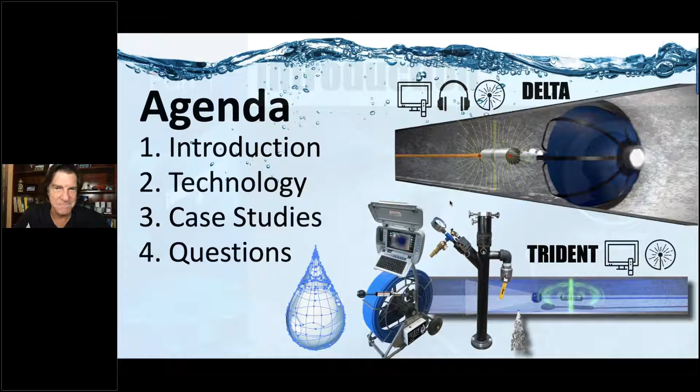So 40 years, 1980, I just turned 65, so been at this a long time. And when I came back after selling Hansen, I got the question, do we really need another way to find a leak? We've got some outstanding technologies that have hunted and identified a number of leaks for the last 100 years. But they all pretty much had one thing in common. If we looked at the past and present of acoustic and some of the data loggers, it's no secret that we don't use these technologies to actually approve new installations. We're pretty much using hydrostatic testing.

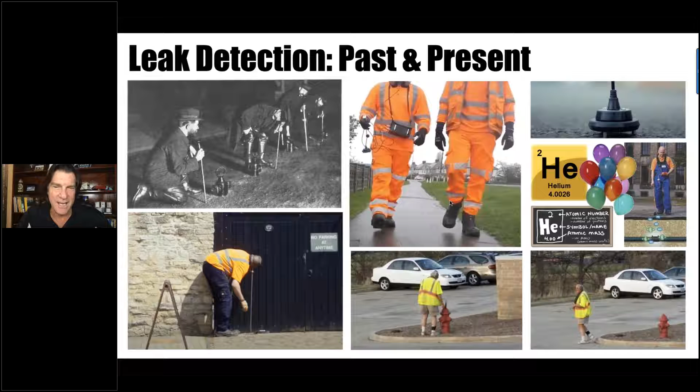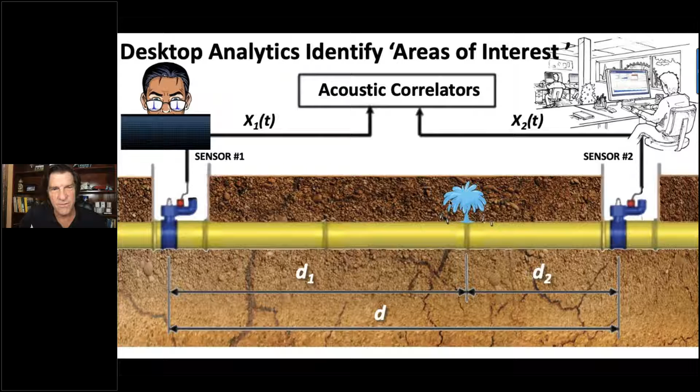So this notion of leak detection and water tightness testing is a big gap in trying to improve our leak detection capabilities. We've had a lot of success with acoustic data correlators, finding that leak location between 2 points above ground. We can do that very quickly. The problem that we've been hearing over and over again is, yeah, we did a clamp on that. We're now going back to that very same pipe. And it's not just once or twice, but 3, 4, 5 times. Why can't we just identify that pipe profile correctly the first time?

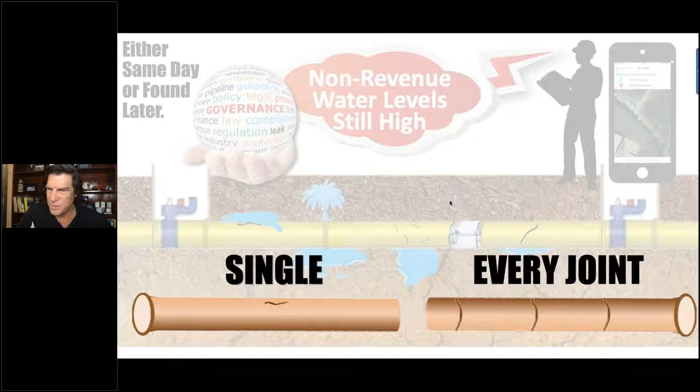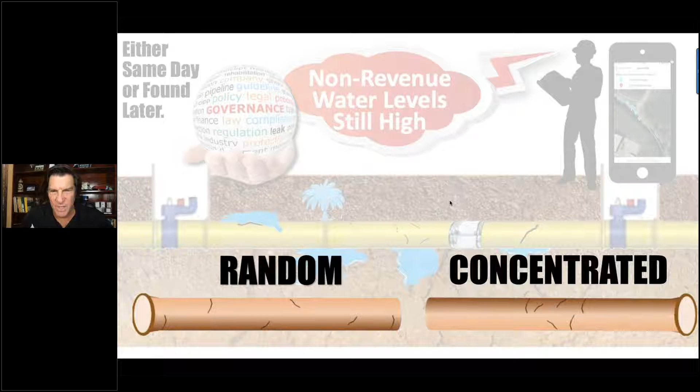And really what we're asking, is there a way to determine, do I have a single crack, problem, joint leak? Do I have something at every joint? Is the problem random throughout the pipe wall, at the service connection, at the tap, at a joint? Or is it concentrated? Because when I go through my AI to actually come up with repair rehabilitation strategies, that's the information that I'm really looking for.

We all know the challenges. The acoustic vendors, some of which may be on this call, don't like to hear this, but the environmentals are really against us in a lot of cases. We know, for example, with household use, there's a good reason that we're using acoustic listening sticks and correlators and data loggers at night when there's not a lot of use. We do know, contrary to popular belief, that if I've got a leak and it's filling around the pipe, that is an instant insulator to that leak. And I'm relying on that exit wound or that exit point of the pipe really to give me that vibration as we go forward.

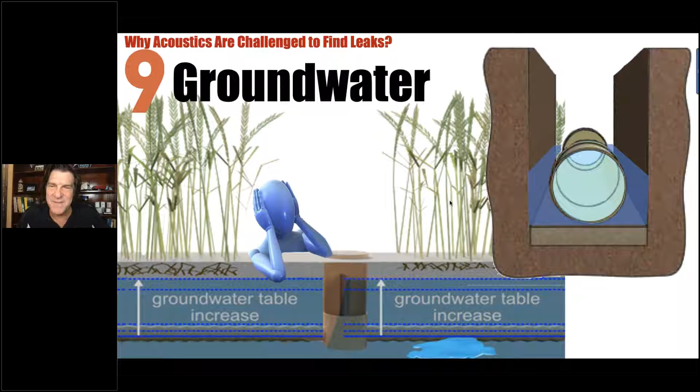Pipe size and material. We're not going to go into it, but a lot has been written. A lot of folks really have seen what can't be found in plastic pipes. We all know tuning forks are never made of plastic, so that's for good reason. Couplings and repairs. Sometimes even a repair can be a false positive, an indicator of a leak when we really don't have one. It's just a change of material.

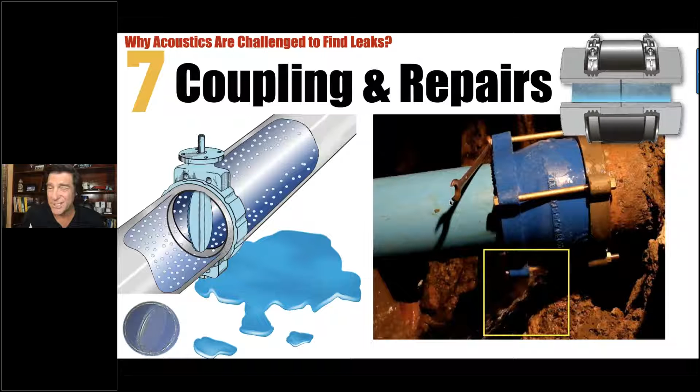Different flow patterns. I've got tuberculation in a pipe. Maybe I've got some debris. Not all flows are the same, and so that traveling noise, that vibration through there is always going to be at risk for things like this. Ambient noise, street noise. We know that's a problem.

Just a couple of minutes ago, I had to tell the guy with the leaf blower to be quiet outside my window here in Sacramento.

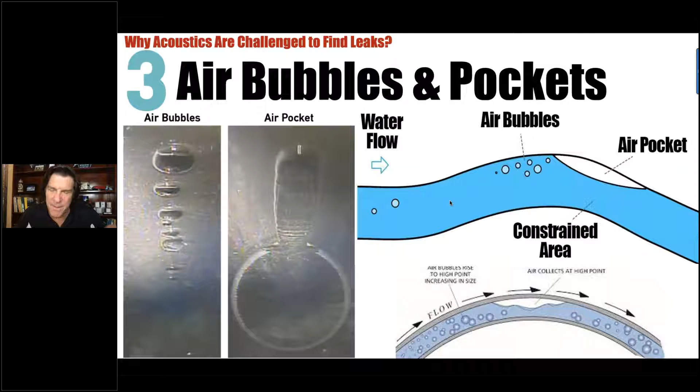Trenching, bedding can be a major factor in acoustic. Just as air bubbles and air pockets, as we're moving through, just that slight noise of that air pocket moving through can be a false positive that we've seen. And then, of course, the subjective nature of acoustics and AI, whether that's done by humans or even with some newer AIs that are out there. And of course, lower pressures. And what do I mean by that?

How many times have we been asked by a vendor, look, what we'd like to do is we'd like to actually turn up the pressure. And studies all indicate, look, when you've got pressure in a pipe over 200 PSI, it makes it a lot easier to hear that sound. You start dropping that PSI into that 60, 70, 80 range, you can hardly hear that leak.

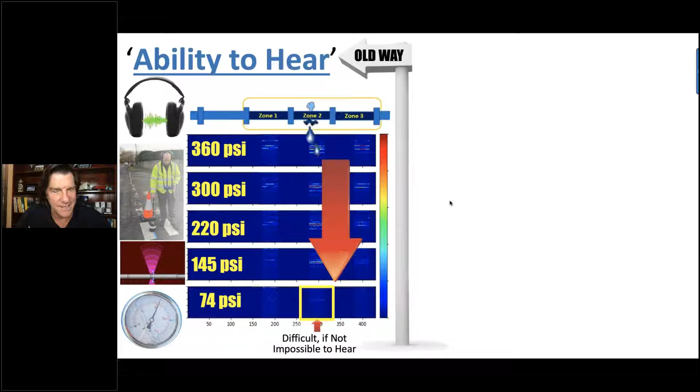So what is Electroscan? Electroscan forgets all about that and simply measures the size of the hole. That's where the leak is. So is there some way that we can measure that without having any impact from all the things that we just talked about? We're going to go to our second quick poll.

And it goes like this. Electroscan surveys are dependent on which of the following? Ambient and street noise, pipe pressure, groundwater surrounding ponding, flow velocities, and you can choose multiples here. All the things that impact us when we're listening. And we'll see the answers coming up here in just 1 second. Pipe pressures, yeah. And I've got none of the above. That's the correct answer. So that's the cool thing about this technology.

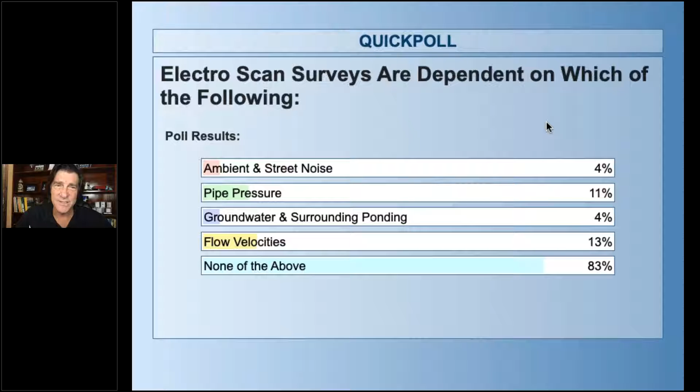Speaking of technology, my old partner in crime, Charles Wilmot. Charles, how you doing from outside of Dallas today? I hear you've got rainstorms. A little, but I think we'll make it through. Okay, great. I can't believe Charles is going to be visiting with us in just a few slides here.

But Charles was actually doing Electroscan work when I was still running Hansen back in 2003, 2004. And so to see some of the awards that we've been piling up just in the last 2 years has been really amazing. And the big reason why Charles is even here with us is the number one question we usually get is how does Electroscan calculate, measure leaks in gallons per minute? There's a lot of high math. And so with Charles's PE and degree in aeronautical engineering, he's the perfect guy for that.

The thing that we have to really construct here and understand is just the pure science behind this thing. And if you can understand or accept the science of this, I know that we don't accept a lot of science being discussed today for a number of things, but hopefully you'll understand this science. If I have on the same circuit two ends, and in water, I'm actually able to use water as the conductor to close the loop, to have electric current go from one end to the other. If you believe that science, then you believe the Electroscan concept of how we find a leak.

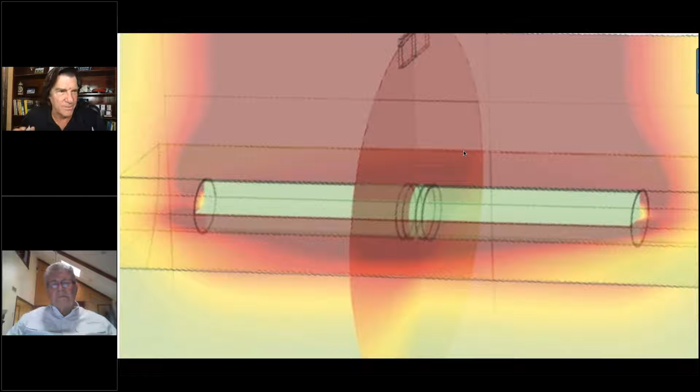And in fact, in using technology like COMSOL, a multi-physics tool, and we've tested these in labs and universities, this is precisely what the defect current looks like. And so as that probe moves through, it's interrogating 360 degrees of the wall of the pipe as it goes through, whether it's pulled through, whether it's a hydrochute or whatnot.

So here's an interesting one, and just to kind of bring you in, Charles, what are we seeing here? Are we a technology that's actually pushing water through the hole? Is that how we measure the hole? What does this kind of picture mean to me, and kind of dumb it down? Well, no, we're just passing an electrical signal from inside the pipe through the defect using the water as a conductor out into the wet soil where our ground stake picks it up.

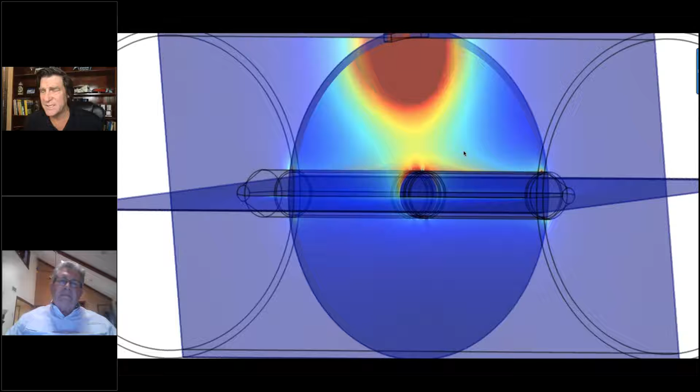We're not impacting the flow in or out in any way. So this could be zero pressure. This could be zero to maximum flow velocity inside the pipe. We could have debris on it. Most debris is a non-conductive bed. There could even be some calcification that's on there. So those don't impact as long as you've got that connection.

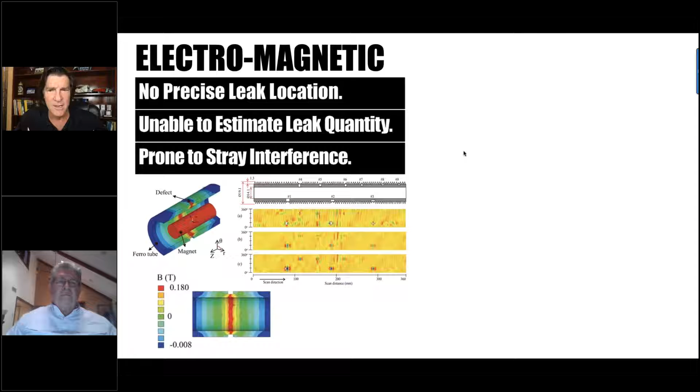And I think this next slide, many people will talk about, well, how different is Electroscan with electromagnetic? And electromagnetic, which some vendors do, is not a leak detection tool. It doesn't estimate the leak quantity. It's basically a CAT scan of the wire framing, very popular in some of the PCC pipes that are out there. It is prone to interference.

And so, if we look at diagrams like this, Charles, maybe you can help explain what we're seeing as this slide goes through. Well, you see the two little black strips in the middle of the sonde represented by the two black dots. What that does is it focuses the leak detection signal in a narrow range, which gives us a sharper response image and helps us tie down the location better. And so that's where the term focused came from, and the term FELL, focused electrode leak locator.

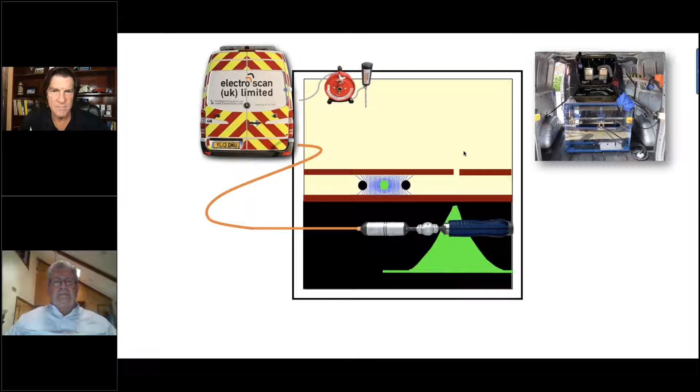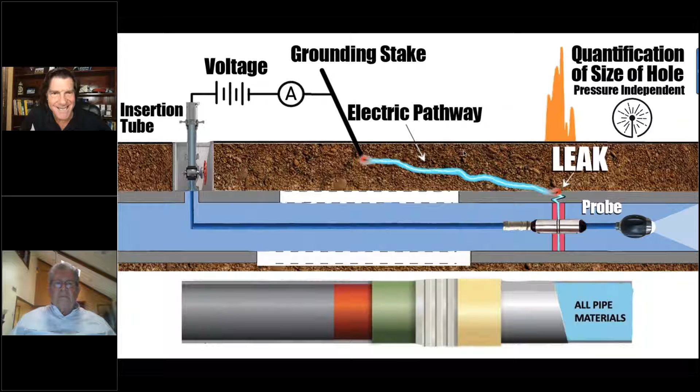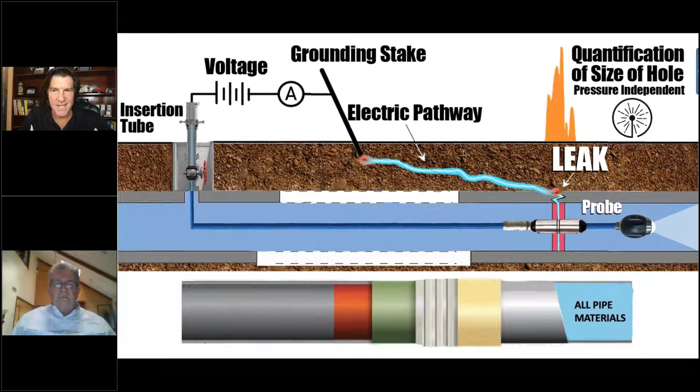And really, as we look at those things, we know how to calculate an area of a triangle base times height divided by 2, area of a curve. The calculus that's really involved with things like this is calculating that area under the curve, that irregular shape. And Chaz, how about explaining what goes into that calculus for computing a leak in pressurized pipe?

Well, as this slide shows, we started out with lab testing where we had defects of known size because we created them. We had a head that we controlled in an open tank. We used Torricelli's law to calculate the velocity coming out of that defect. And if you know the area and the velocity, Q equals VA, so you know the flow rate. We calibrated the coefficient of discharge in the calculations so that we could match the two up.

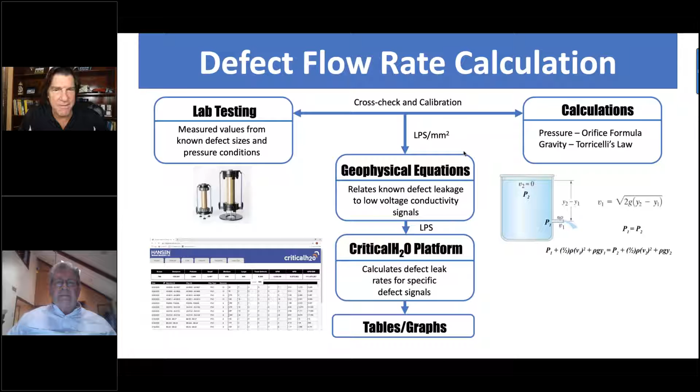Then we moved into the most significant, unique part, the geophysical equations, which allow us to relate that information to the Electro Scan signal. And as you said, we're calculating the area under the curve based upon the amplitude and the width of the defect signal. Okay, I can understand part of that, but to be a little more focused, the biggest difference is we know there's going to be a different flow rate based on pressures and pipe materials. So maybe walk through this graph with the audience.

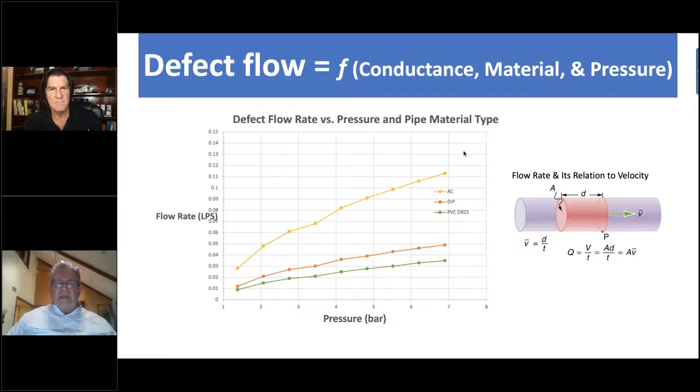Well, of course, we have unitless discharge coefficients in the calculations, and we have different parameters that can vary. For example, the size of the defect versus the thickness, the length of the defect, which is the thickness through the wall in this case, varies from thinner pipes to thicker pipes, and we're able to calculate and consider that in our overall calculations.

Okay. So, just to summarize this process, and again, we can have other technical sessions, this is part of the AWWA M77 manual that was published in 2019. So we're delighted to have that. But now in some of the revisions, you'll see us crossing all different pipe materials, including cast iron. What would you summarize in this slide?

Well, this shows the various steps that we've gone through in the past. We continue to laboratory testing, linking it up with the calculations and the calibration, using the geophysical things, and then field applications and verification, which is an ongoing process. We have some projects where we have flow data to compare to and other data to compare to. So that's ongoing, but we know that many parameters can vary when you get out in the field, out of the lab and out of a controlled situation.

And we use a consistent approach and a uniform set of criteria for all the different defects in individual pipe segments and multiple segments and different jobs, so that we're able to compare them on the same basis. So we can say leak B appears to be twice as large as leak A, and leak C is half as large as leak A.

So if I can summarize that, you are saying that all leaks in a pipe segment, and I could have point repairs in there, I can have change materials, but they are using the same calculation across all those points. So basically you're presenting an even surface, a playing field to calculate those. Yeah, a comparison based upon consistent criteria.

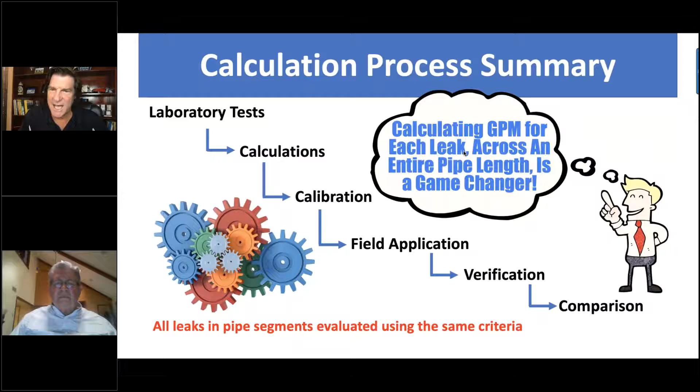Yeah, good. So, I mean, look, nobody has done GPM. If it was easy, everyone would do that. So I'm really understanding that.

And just to kind of run through what data looks like, here's a recent UK scan. You see 4 or 5 defects that are in here, but you can see on a relative basis that leak to the far left is very different from the leak to the far right. And I would almost tell you that's the leak to the far left that's the largest, because it's the area under the curve. It's how large that leak is, how much electric current is being measured through that.

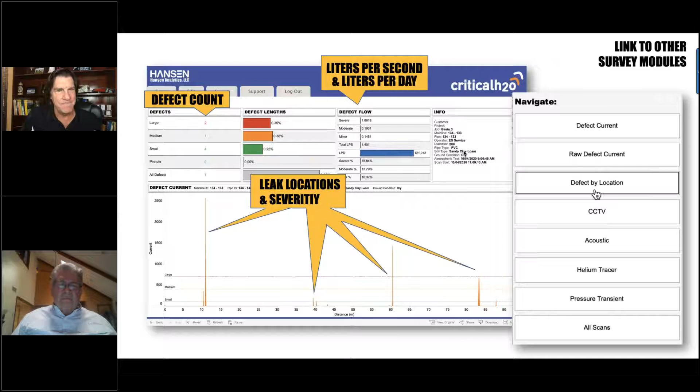And the other benefit here, which is just a major overcoming of the data logger scenario, where maybe 1 or 2 leaks are identified, is finding those scenarios where every joint is impacted. And I've seen it 100 times where new pipes that are being put in, these are some of the readings we're getting because the gaskets weren't put in, they weren't seated. Angular rock is coming in. We're going to see some of the examples in here.

So just the ability to begin identifying to this granularity, I think, is a major thing. And we want to be able to see, to know, yeah, we've only got 1 leak in there or 1 defect, and to see that.

Here's just an example of the data that we'll do in some of the testing. You'll notice that plastic tube on the far right, hopefully it's not covered up, has 4 red circles. And the probe is going up and down repetitively, and it's outputting all of the data to the left.

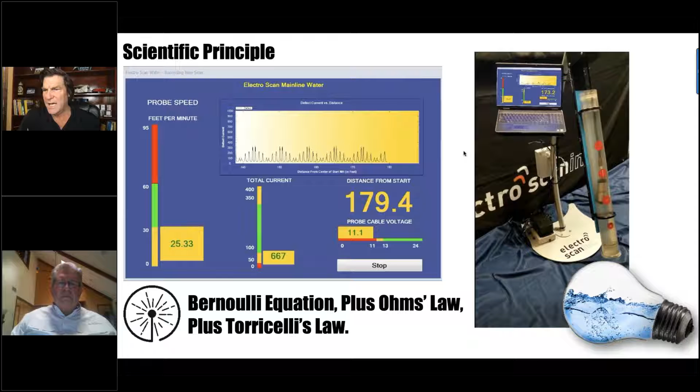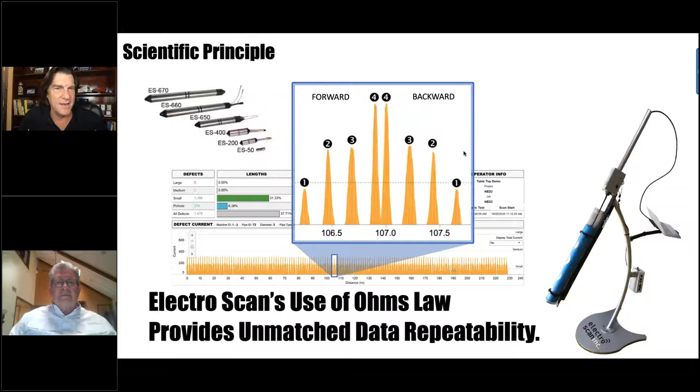So Charles, explain what we're seeing in this scenario. Well, this is a thing that we developed for different shows and presentations where the probe is moving up and down the segment of pipe, and you can see going down, you have defect 1, 2, 3, and 4. Coming back, you're measuring the same, 4, 3, 2, and 1, and they're essentially the same. Well, this is kind of easy because you do the same. Of course, it's got to be the same. But what happens in other situations, we'll bring that up.

And then more importantly, what happens when there's not a leak? Because we see this a lot in CIPP. In fact, we're seeing this a lot in water lining projects that are out there. And IKT themselves did some live fire testing where we were looking at the leaks and the defects in CIPP. So scan 1 was upstream, scan 2 was coming back. So they were confirming that same thing. They're out of Gelsenkirchen, Germany.

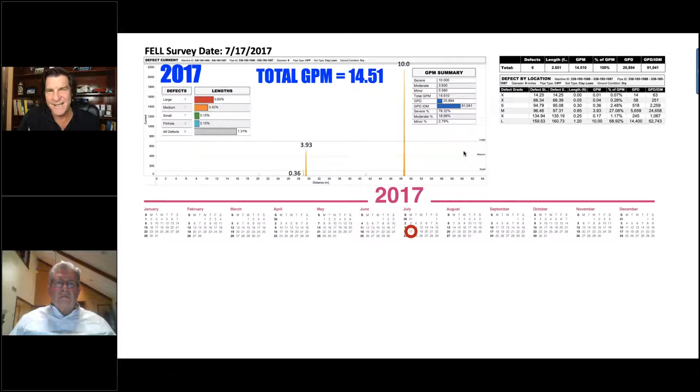But the true test of this is over time. And I want to talk a little bit about this RUL equation of remaining useful life. Because if we're finding this in a new CIPP, look at this, here's 2017. And let's say I come back a couple of days later, like 865 days later.

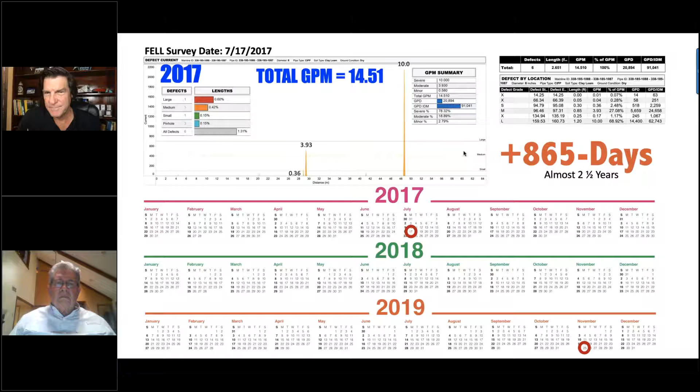This technology, number one, precisely locates the defects, finds they've gotten a bit worse, and it's actually picking up now new pinholes in this eroded lining. So I have all of the data in 40 years of Hansen mainframe programs that my dad and I did in the early 80s, in the 70s. I'm almost to the point where pipe material and age and diameter has no bearing on useful life. It is almost down to what contractor put it in and when they put it in.

And because electricity and water have a 1-to-1 correlation, I'm now looking at a technology that has the capability to measure the permeability of pipe materials, not just on a piece-by-piece basis, but now on a 360 full-length basis. And why is that important? That is important because I now want to measure PCCP pipes, and I want to know what I'm most afraid of, which is that water main break that I can't see, that water main break I can't hear, and that water main break that electromagnetic may not even have the wires correlated to.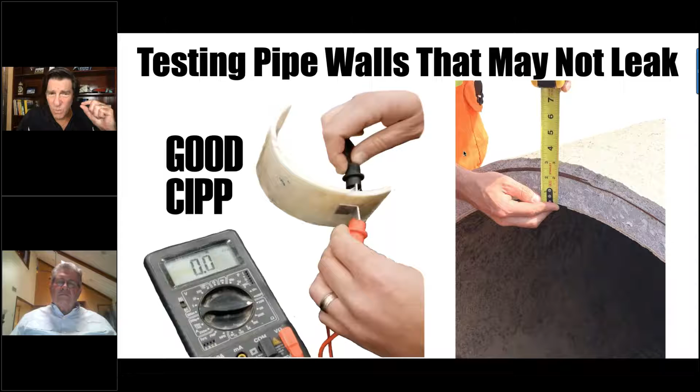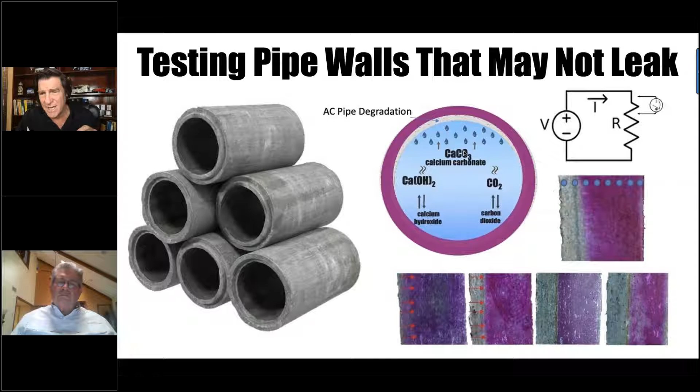We all have seen stains of this. The purple is good, gray is bad. So the ability to actually look at cement lining without even having the steel reinforcement in here, we're measuring the permeability of that liner. And now we can map geometrically from station point A to B. And so where I'm looking at the lowest point, those are going to be my most difficult areas.

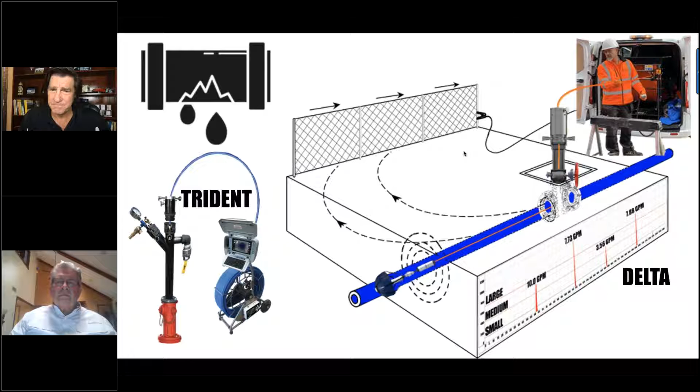So looking at the secrets of mining the data of our raw currents. Sometimes we can have 20, 30, 100,000 data points that we're now machine generating, all this information. And if we do have a leak, there we go. Couple of other questions we get technology-wise. Is it safe? This is not the movie Marathon Man where we're asking if it's safe with Dustin Hoffman.

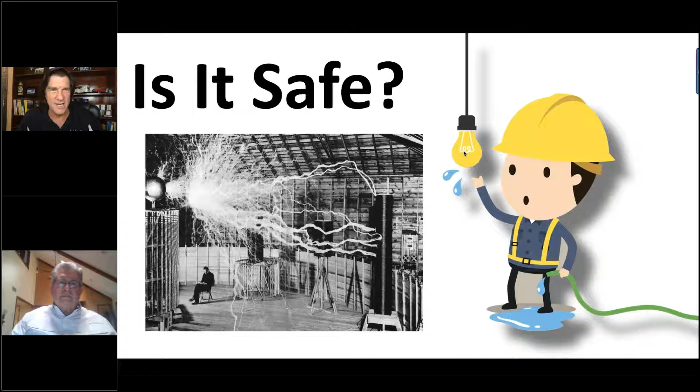And so all I have to do is have that water as the conductivity, a meter or 2 meters from the probe, because I've got to get that up, or otherwise it's going to dissipate. So there's no risk of it going up, following through to a household. Electricity can naturally dissipate. What does that mean with us getting to the grounding state? The minute it gets out to the dirt, it can travel almost an infinite length.

What about interference from underground lines? And again, we've had the luxury to go anywhere on the planet. I happen to have a couple of buddies with Tokyo Metro, so we went over there with our translator and actually did one of the most difficult intersections. No dirt, nothing else. We had 3 subways going underneath this, no issues, no underground interference, clean readings throughout the Ginza. And that's one of the reasons why today this technology was actually awarded a water tightness testing standard by the Japanese institute there.

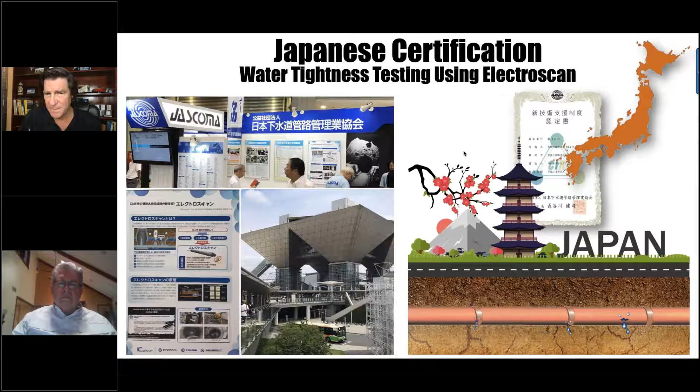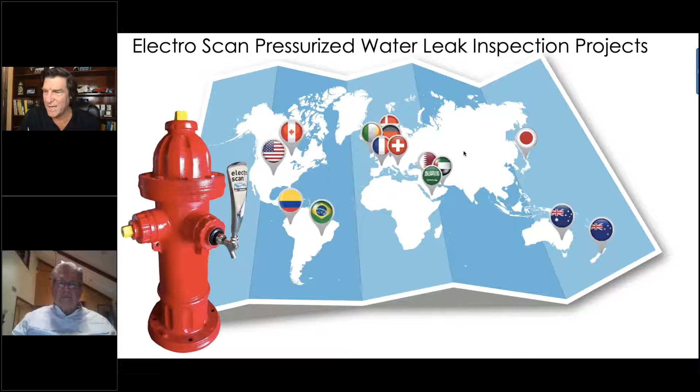You look at some of the other things that we did with Paul Boulos and some of the great guys that have been there, now Innovyze, now Autodesk. So integrating that data, that's why we have projects all over the world and kind of pick and choose the projects that we have. But enough about this. Charles, I want to thank you so much. But we want to see real data. You know, we don't believe this thing unless we do that.

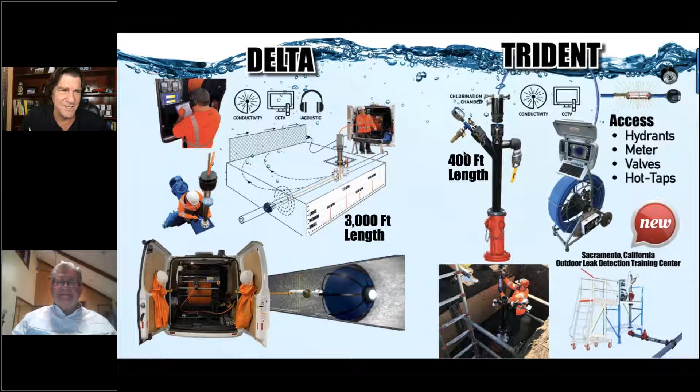And we're now on to our last quick poll question. And the question is, what technology locates and measures leaks in gallons per minute? Acoustic sensors, data loggers, low voltage conductivity, or FELL? This is what Charles calls focused electrode leak location. And the last one was data correlators and satellites. So what measures automatically that GPM, again, across pipes? And I think if you really talk to the real people behind this, there's probably a 10 to 20% give and take of the GPM. And we'll see the answer coming up here.

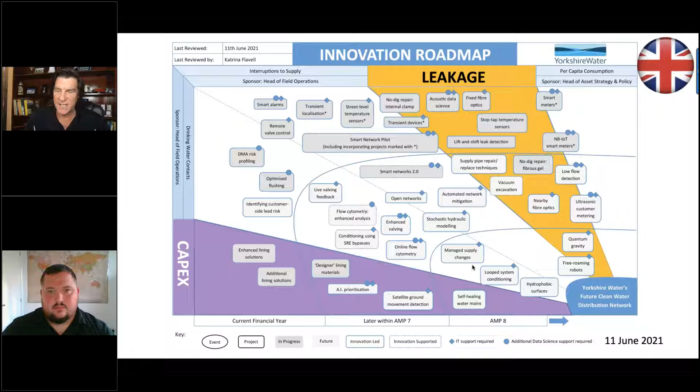When we saw this a year ago, we saw leakage - that was an integral part of this. And I was really surprised to see them include capital efficiency, this CapEx technology. So that was very cool.

And then the other thing is, I was really excited because of our response. We actually included all three of the products that we have: Delta, which is Electroscan, CCTV, and Acoustic; Trident, which is a push reel, that's Electroscan and CCTV; and our secret weapon, Swordfish.

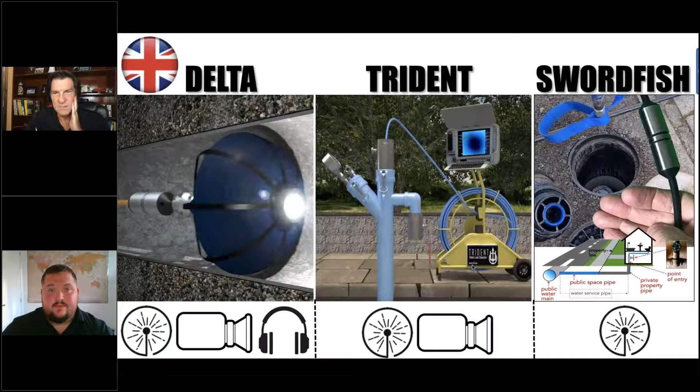So what I particularly liked about these challenge statements was it covering this QA/QC of trenchless technology. We started the first trenchless projects in England - they came out of England I think in 1971. I was still in high school, I'm class of '74, so I was still in school when it first came out. But today it's fairly complex, and you're seeing 4 different water CIPP projects, all from the UK, I might add, because we're doing a lot of that.

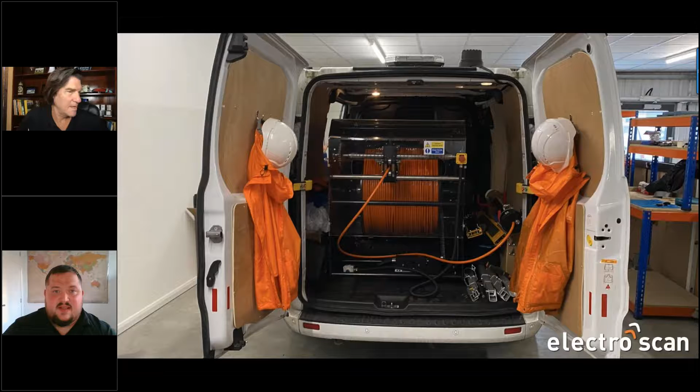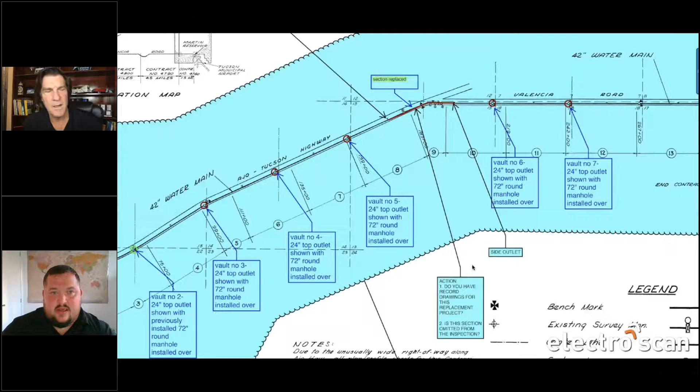So as you can see, this is our service center located in Swindon. Here we maintain and prep both our sewer and clean water kit for projects in separate designated maintenance areas. The Delta system you can see here was being prepped for a project whilst crucial project planning was taking place, such as maps, GIS planning, and aerial view reconnaissance.

Working with various contractors, as you can see here, our team is setting up on one of the pipes, and the line's pressure is being constantly monitored for any change or deterioration.

So this clip here is us setting up a delta survey in the middle of the countryside. All equipment is kept off the ground to prevent contamination to the water supply, and has been sterilized using a chlorine solution.

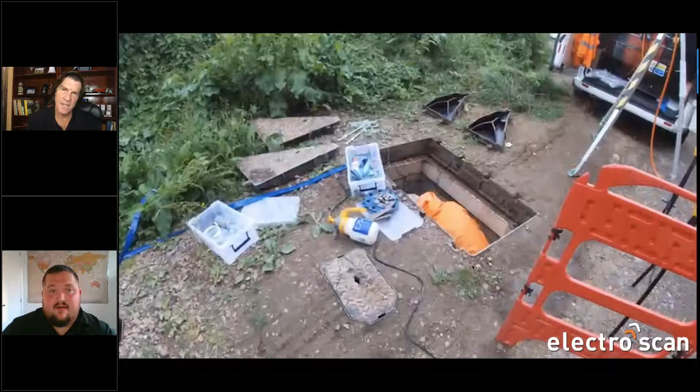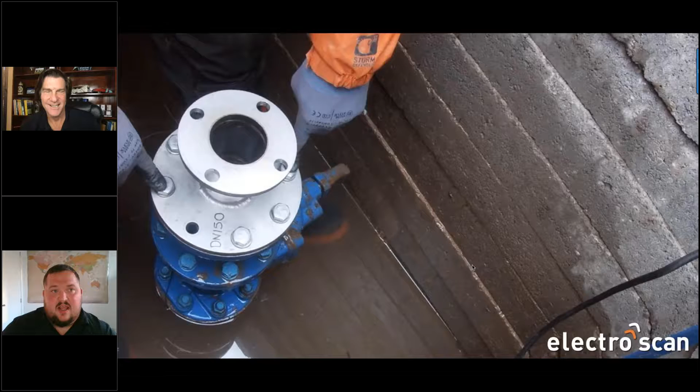You can see there, that's my senior technician, Chris Chesworth, pointing out the bolt pattern to make sure that the plate is done up securely. This is because we want the flange to spread and seal evenly.

Once this has been achieved, we attach our launcher and set up our electronic equipment to carry out pre-tests before the probe enters the line. You can actually see here when I walk over, the launcher has now been pressurized with the line, and we are now good to go and scan.

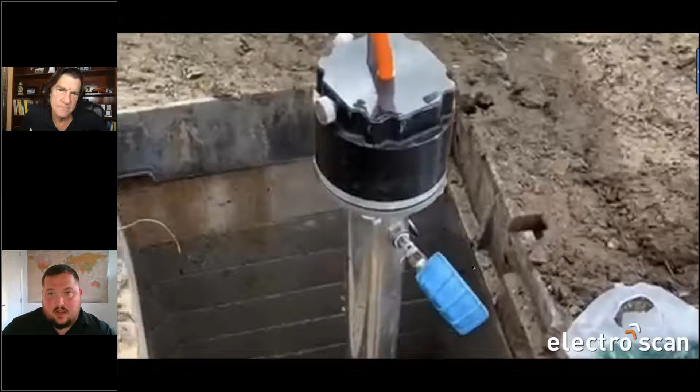So the reel feeds into the launcher and into the line with myself and Chris Chesworth assisting the cable into the launcher. This is what's happening inside the pipe. Once the probe has been inserted, the flow will inflate the hydrochute and carry the multi-sensor probe down the line.

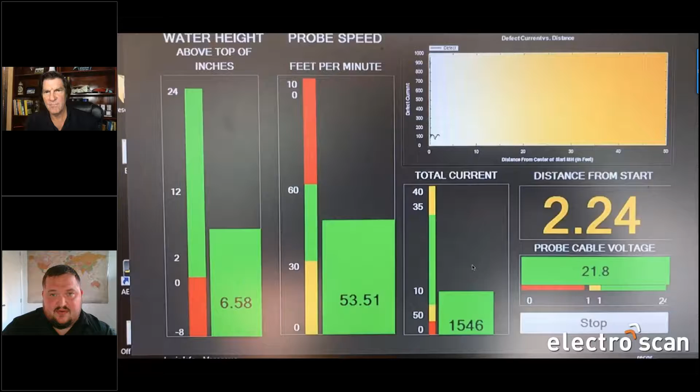As the probe goes down the line, FEL, acoustic and CCTV surveys are being carried out at the same time. Our FEL is monitored constantly through our mainline application software to look for points of interest along the line or a very visible defect, for example, a leak in a pipe.

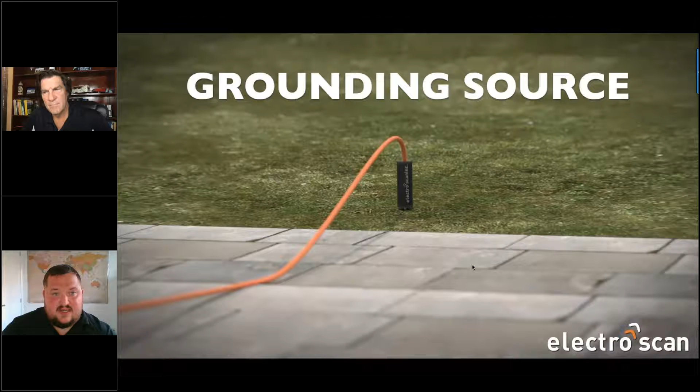So when we get this information from our data that's being collected through our grounding source, you can see it being placed onto the ground just here. And while that's happening, we are collecting acoustic points of interest, which is being marked down by the operator on the side of the van.

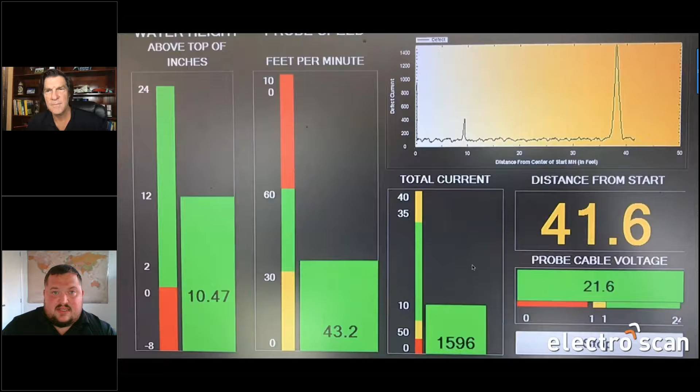So the survey will continue until we've reached the required distance given by the client, or if we're looking for a certain objective. Then it is retracted back out of the pipe by our ground crew, in this case myself and Chris Chesworth. Obviously, you can see that we wear all the relevant PPE to make sure that we keep the cable clean.

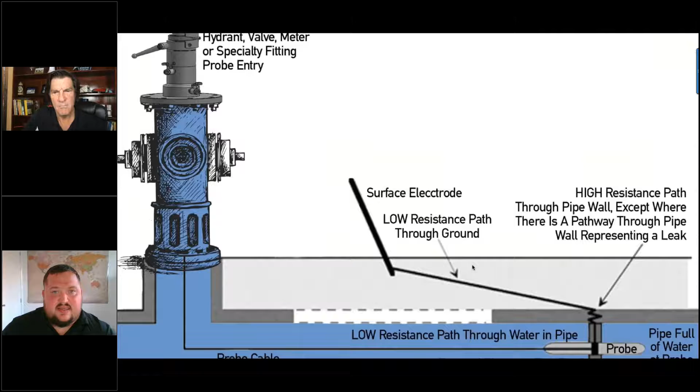So here's a quick glimpse of the raw defect current graph that's generated at the end of the scan and is also recognized by AWWA's M77. Electroscan's leak detection equipment is a precision-based leak detection tool with a locational accuracy down to just 1 centimeter. And that's all for that video.

Yeah, great. Okay, well, let's slow down just a bit. Brad, that was very informative. I appreciate that. That's kind of a typical thing.

So how about we dive into some of the metrics, some of the real numbers that we get. This is one of your Delta projects in the UK that was about 171 meters, 24-inch cement mortar lined ductile iron. Tell us about that.

Absolutely. So this was a water main that was trying to be newly commissioned, but it actually failed multiple pressure tests beforehand.

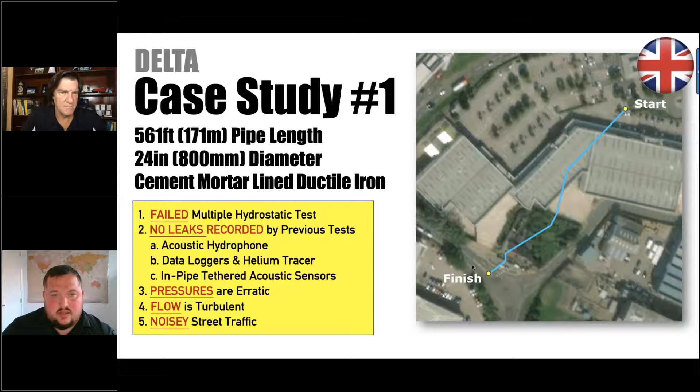So we arrived on the job site, we got everything set up, and we actually completed all the work in just under 3 hours. Wow.

So Brad, did that include finalizing the data? I mean, I see you got a spike up there. What kind of reporting did you have available on site?

Yeah, so that did include finalizing the data. So what we actually done is we partnered with an internet provider named T4S that gives us 98% coverage of the UK market, which is obviously really needed sometimes. And within 5 minutes, we actually had all our results with us on the site that we could present to the client.

Yeah. Yeah, I really love, I know there's Microsoft Azure out there. We've been an Amazon Web Services partner for almost 10 years. They've got 9 of their satellites around the world. So globally we have this. So whether we're in the Strait of Hormuz, north of Dubai, or in England or Australia, we get the same kind of uptime worldwide in this. So it's a real impressive thing.

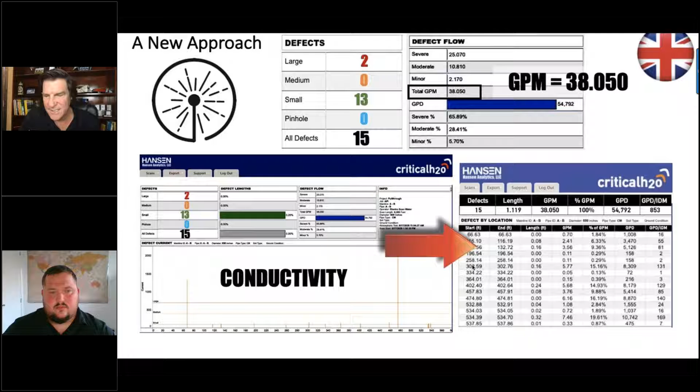In this particular case, what we're able to do is, because we saw those two big leaks, we're able to go to the biggest one and now see it matching an angular rock that was put in there. This was a new pipe that was installed. So now we can definitively say that is not just a rock in the joint, that is a leak. Water, electric current, is passing out of there, and that's why you're losing pressure. So it's a great indicator of that.

The other thing I want to say is we're now evolving. There's a lot of AI in this, and I'm not a big fan of AI for acoustic. If we're missing so much with acoustic, that's a lot of brain power for what we're actually not hearing. In our case, we're really looking for ways that we can identify and match the leaks that Electroscan is finding to fixtures in that pipe.

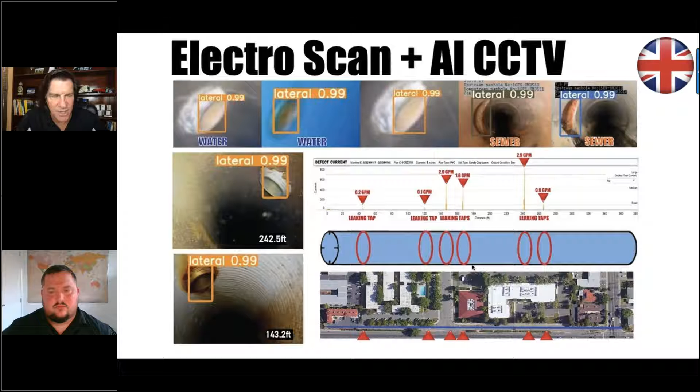Is it at a connection? Is it at a joint? Is it in the wall of the pipe? Since the TV camera has the same footage encoder as the Electroscan probe, we can match those up, and now we can with 99% accuracy identify that to features inside of the pipe.

We'll switch gears and do a US study, and we have our Trident. We borrowed this from the UK, and Brad will talk about this in a couple of minutes. But here in the States, we typically enter through hydrants. A lot of other great companies have done this before, it's just they used acoustic, so it was TV and acoustic. This is TV and Electroscan.

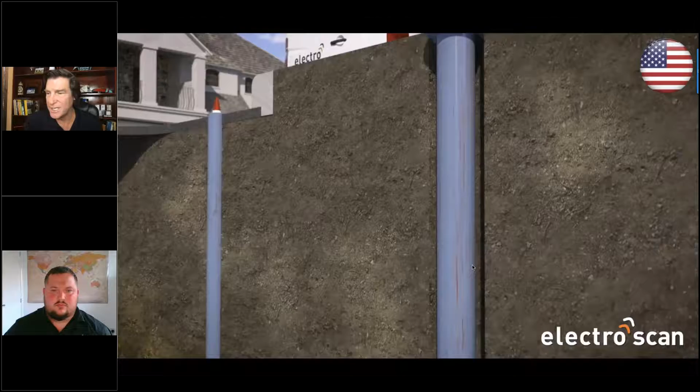So as we look at the flanges that are built on our Trident insertion tubes, whether we fit directly over that, we look at what the bolt patterns are. We're able to put our camera directly into that, closing that. We see how our chlorination chamber will chlorinate that cable as it goes through the pipe by pushing the pipe through. This is usually a 2-person operation. I'll show you a picture of that in a second.

But again, cameras are great for positional navigation. Is this valve open or closed? We want to make sure that that's open. Do we have extreme calcification in that pipe? If so, we may want to back out and have that pipe cleaned before we do that. And then getting that good TV, we know that TV can't find the leak, they typically go outside of the pipe. So really having that scan, whether we're pushing or pulling back, is really what the Trident is all about.

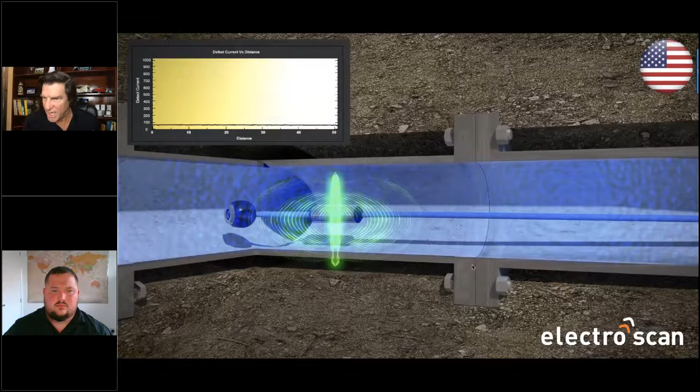This is a 400-foot push reel, 120 meters for our British folks, and that's the ability that goes in. So here's an example. Here we know there's a leak. We see the water, and it's about 10 gallons.

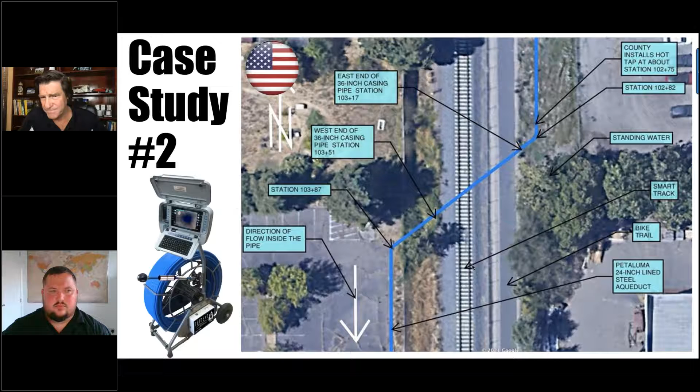So the problem is, where's it coming from? Is it coming from the track where we can't really get to, or some other location? And so the Trident was perfect for this. We had an entry point that we could go into. Typically, we'll either enter through a hydrant or hot tap or valve that goes in.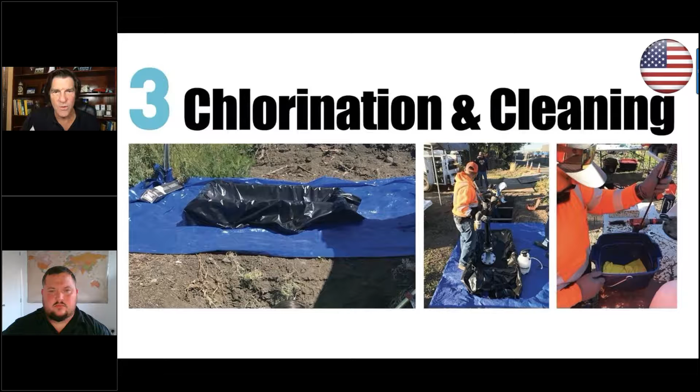We like to put a flow meter into that entry point, so we measure velocity. We know what the velocity of the flow is. We know the direction of the flow, if there's any question about that. We've got a chlorination area, so any of the instrumentation is cleaned before it's installed. It's very carefully put in place. Everything is done under pressure, so we'll confirm where that pressure is.

And notice I said it's a two-person crew, only because the footage encoder is actually on the reel itself. So what we want to do is position that camera at 0. Our accuracy we claim is 1 centimeter. In a lab, it's 1 millimeter. But really what we want to do is when we enter the pipe, that is where 0 begins, because we want to be able to know where that is inside of the pipe.

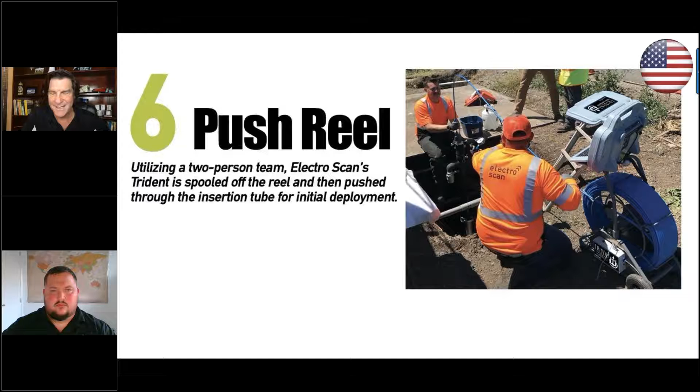And so as we're taking cable off of the reel, we want to be putting that in the same so we have a nice, easy flow for that. We look at the data, we're capturing the video, but this is a big difference now. And I'm going to talk about AI from a pretty different angle.

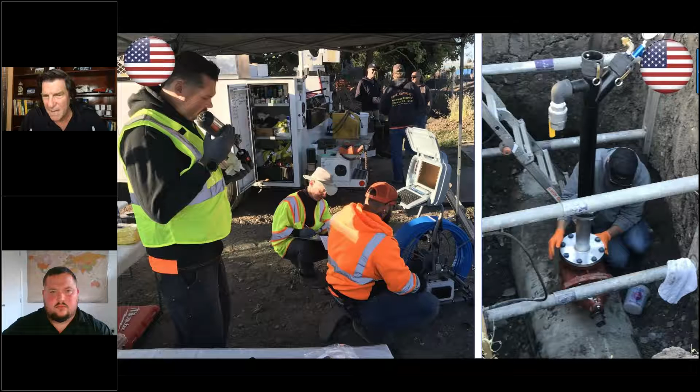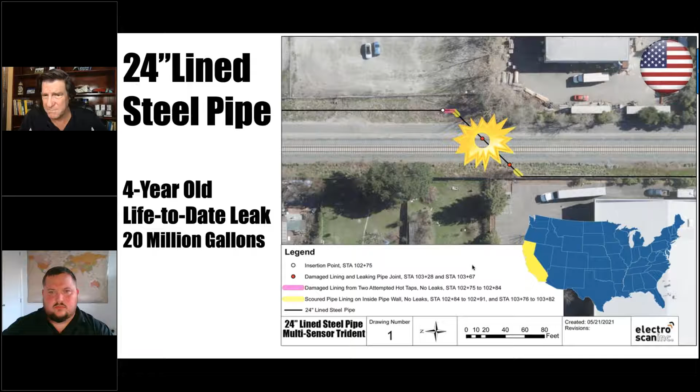Here I find a leak. Now what I want to do after I get the probe out, or maybe when the probe is still in, I may want to do something else. If I find out where that leak is, in this case in the center of the rail track, and this is only a 4-year leak that goes back, that's already leaked 20 million gallons of a 24-inch lined steel pipe. But I want to do something different.

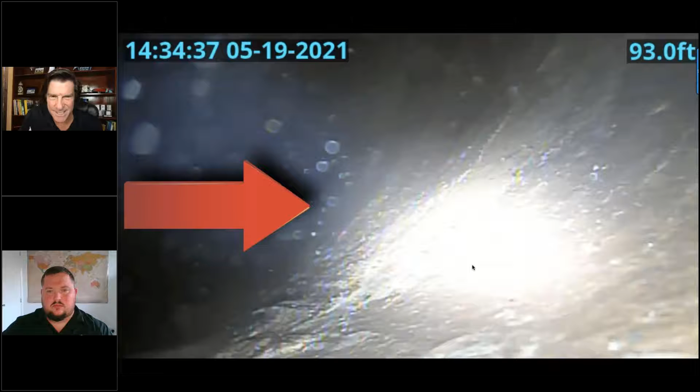I may want to position and stationary point my camera and look at the flow and see, as in this case, if I can see bubbles actually moving towards the leak itself. You can only do this if you have accuracy in leak detection like Electro Scan. So if I tell you where the leak is and tell you where to look, instead of having a continuous CCTV, then I can stop and reposition this.

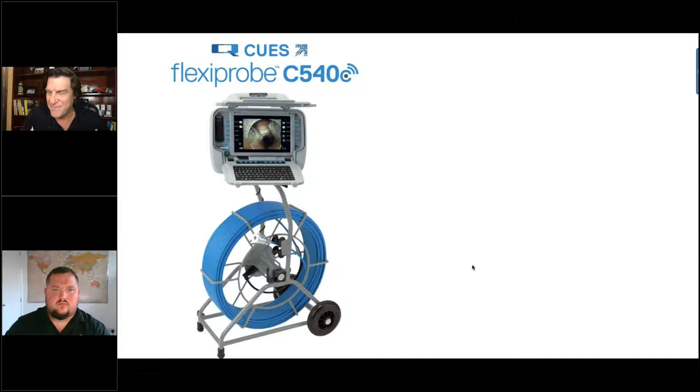That also brings a whole new level of AI where you can measure the flow intricacies. This is where we're now going with TV. And I need in some cases a higher resolution to do that. Fortunately, I don't have to reinvent the wheel. CUES was kind enough to do the FlexiProbe C540. So if that looked familiar, we just add a few attachments when we sell it to utilities and contractors, and also include insertion tubes to do that.

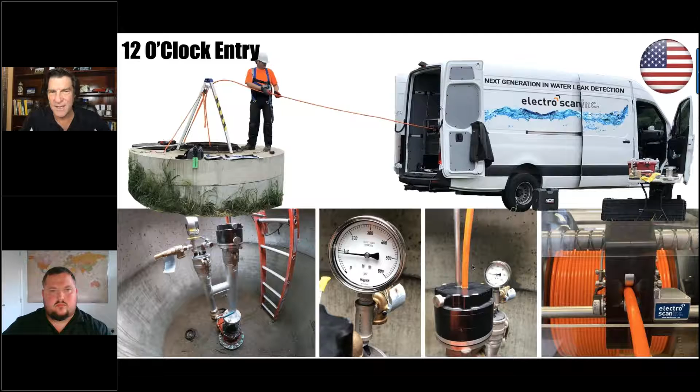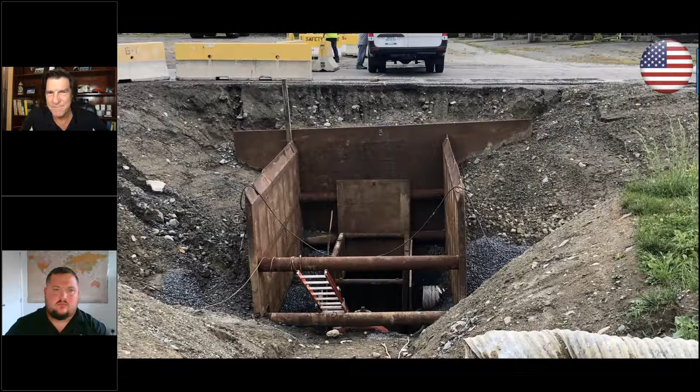Third case study I'm going to go through real quickly. Here we're coming in a 12 o'clock position, and not only that, but also a 3 o'clock position. As we see, these trenches have to be 8 to 12 feet. You can see where our truck is relative to that. And now you can see where we come in and start measuring wall thickness and decay. So not just finding the leaks. This is not what electromagnetic does. This is what electric current can do, low voltage current.

Brad, I'm going to jump back across the pond. Tell us about this little case study before we wrap up this section. Yeah, so firstly, I'd like to thank Thames Water and PN Daly. Without their request for us to make a small diameter push rod system for clean water in PVC pipe, the Trident wouldn't have actually been made. Trident was purely created down to a client asking us, could you make something that could do this?

So back to the case study, the pipe was in an old part of London, approximately 140 years old. But unknown to everyone, the pipe was actually a cast iron pipe. It was supposed to be PVC. Even though the pipe was cast iron, we still actually managed to find 9 leaks on that line that were identified to the client straight away. Yeah, I was seeing the upload and I thought you had a typo when you put in cast iron for this one.

And the last case study, do you mind sharing what happened on this recent project for an unnamed UK water company? Yeah, absolutely. So this one was a real mystery for the water utility, as they had experienced a series of main bursts and didn't quite know what was happening with the flow. So we first tried our Hydrochute on the Dove system, but when the flow measured 0, we decided to use our Trident push reel, which has CCTV and Electro Scan. And we were a bit surprised with what we saw in the leaks that we found.

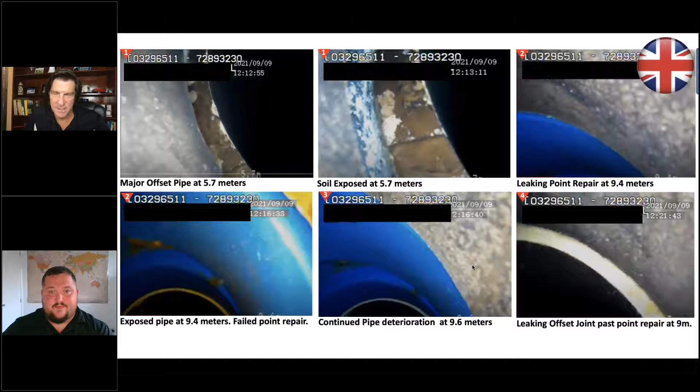Yeah, non-trivial. Well, thanks on that. Kind of eye-opening. So, we're coming to the end of this section and before questions, but we're now seeing, at least in Electroscan clients,

a demarcation line being drawn, and that is what is defined as smart leak detection is really more water tightness testing. You'll never see it in any of the inspections, but what we're now seeing is if a pipe looks like this before, we want to do a before and after test where we've got maybe one or two things that we can quickly fix, hold a contractor accountable for that.

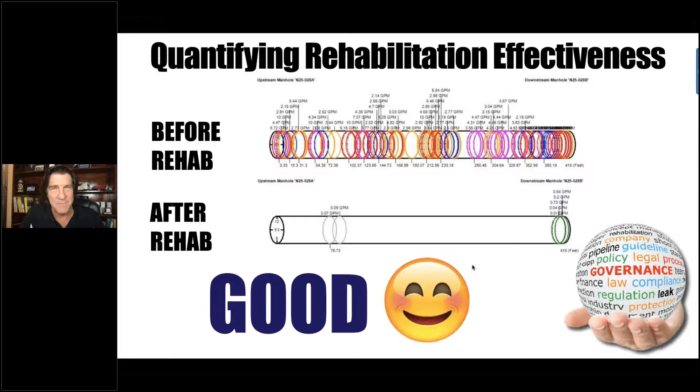We all know kind of the intricacies for hydrostatic testing. I've only been around hydrostatic testing for 40 years. I think my 13-year-old daughter could fake out a hydrostatic test at some of the pressures we have in some of these things. What we don't want to do is have a situation where we have leaks before rehab, and then we're actually having more leaks after rehab because of some of the damage that can be done. And that damage can be in reopening some of the taps as we look at those lines coming in. So this is what we're seeing.

And so I would almost have to say that, as I look at leak detection, for our company at least, the number one thing we're focused on is we want to present, no kidding, unambiguous data on what pipes are good. And I think we can do that with this technology. So CapEx avoidance. And in the UK, we're busy over there because they've almost had to recapitalize all of their pipes and put them on a replacement. Some pipes don't need to be replaced.

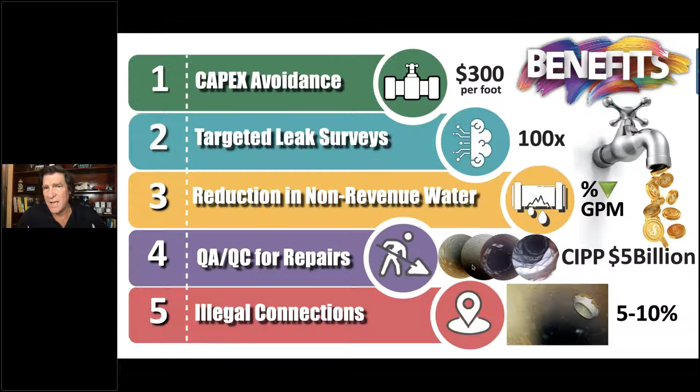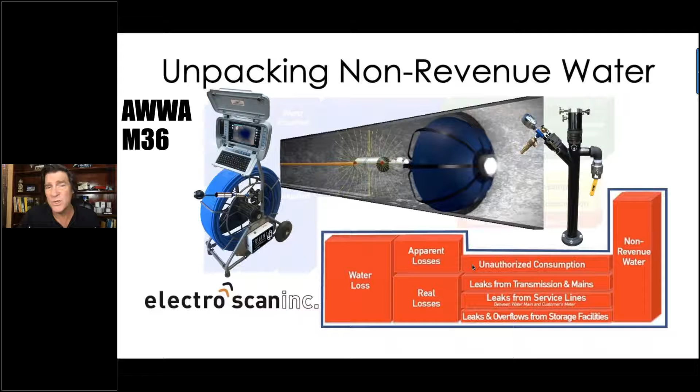The targeted surveys that we're doing for leak, reduction in non-revenue water, some or all of you can benefit from that. The QA/QC of pipe repairs when that pipe is back under pressure. And then as we see in some countries, just looking at illegal connections and knowing which ones leak and don't leak. So as we look at the water balance and unpack that, I think the products are pretty relevant. It's one more tool in the toolbox, depending on what you do.